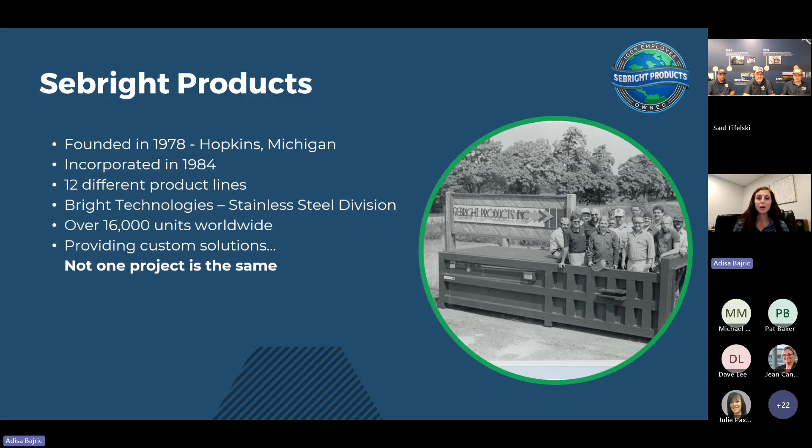We have over 16,000 units worldwide, and we're very much known for our custom solutions. Not one project is the same here at Sebright. We work hard to make our equipment meet the customer's needs.

Just a little bit on our mission, vision, and values. Our mission is to solve waste and recycling challenges through innovative engineering and manufacturing while upholding the highest standards of quality and safety. Our values: quality, community, safety, innovation, and resilience.

Our capabilities: we have an in-house engineering team that uses advanced 3D software for precise, efficient installations and custom solutions for diverse and challenging sites.

Our manufacturing, all of our equipment is manufactured here at our plant in Michigan, all made in the USA. Our install, we have an expert crew that delivers turnkey installation. Our service department offers comprehensive service solutions including PM programs, parts and service with 24/7 nationwide support.

We offer a rental and lease program as well, just some flexible options with buyout and rental assistance. We also have factory remanufactured equipment, with a factory warranty on the REM equipment.

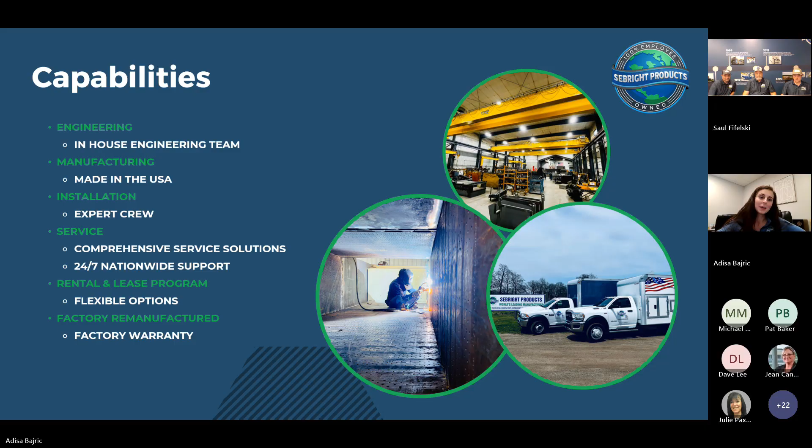And as of April, we are 100% employee owned. Something we're very proud of here at Sebright Products. All of our employees are now an owner, driving accountability and long-term success. In July, we became ISO 9001 certified, showing our commitment to consistent quality and continuous improvement.

We also have lean manufacturing practices, streamlining operations for efficiency and reliability. And as I said, last year we celebrated 40 years. We have 40 years of innovation with a proven track record of durable, high-performing waste and recycling solutions.

And then our vast list of product lines here. We have compactors, our bread and butter, where it all started for Sebright products. We offer stationary, self-contained, pre-crushers, transfer stations, which you're all here for, and portable units.

We've got our high-density extruders, which is a ram press that we introduced in 1992, used to extract liquids from many types of industrial refuse byproducts. A lot of pulp and paper mills use our high-density extruders for their dewatering process.

We also have an EPS densifier for styrofoam densification. We have our Xcycler and Xtractor line, which is for product destruction, primarily in the bottling facility. The Xcycler produces bales of aluminum and plastic, while the Xtractor produces a continuous log.

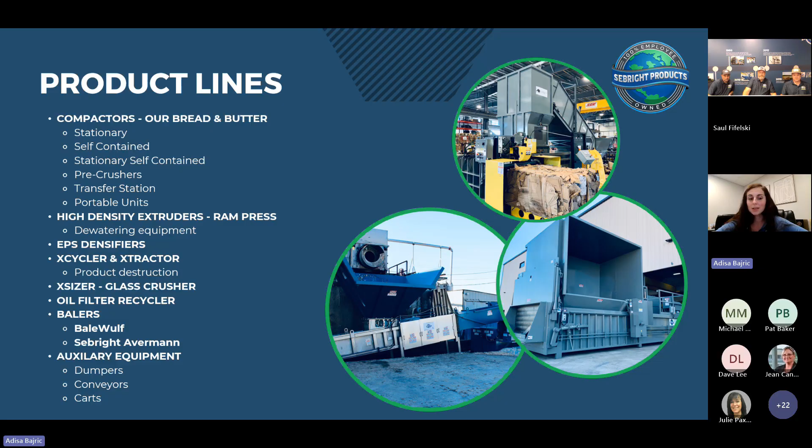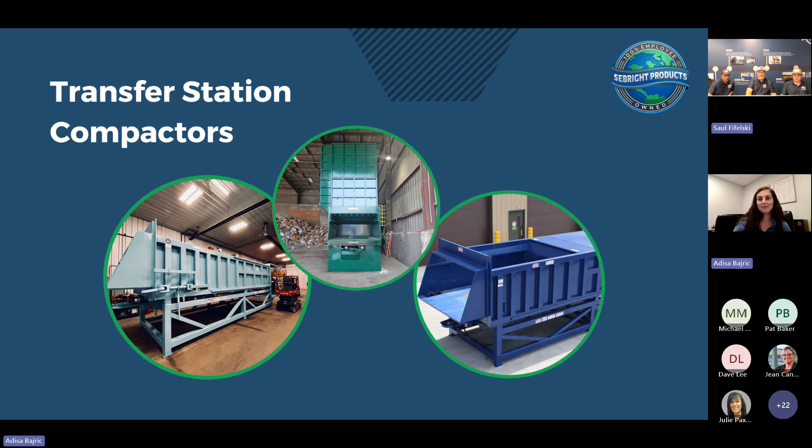So from here, I will hand it on over to Lauren and get you guys started on the transfer stations. Thank you, Adisa, for the wonderful introduction about our company. All right, we're gonna get started on what everybody came here for.

As you know, we incorporated in 1984. We'd already been building 2-yard compactors, 4- and 6-yard compactors, which is our heavyweight series. In the late 80s, early 90s, we'd just finished introducing our 5-inch wall, solid wall pre-crusher, and just had that on the marketplace.

Brent Sebright had caught wind that a company in Grand Rapids was looking for a transfer compactor. We as a company were looking to grow our line, looking to expand our marketplace, took on the challenge with the current engineering team at the time. In December of 1991, we installed our first model, the 9884-2-6, twin 6-inch cylinder compactor.

Spent many years in the Grand Rapids area. Now it's been moved to another location, but ironically, like 34 years later, this unit is still in use today. Yeah, it's very impressive, that's a long time. Can't say that about a lot of units.

Coming through the 90s, we built some variations of that 9884. Some models went to Canada, others went to Wisconsin with the help of our dealers, JWR and Step Equipment. In the mid-90s, we figured out that the 9884 needed a bigger version, bigger chamber, more power. So we developed the model 12084, I believe in 1994. About 4 years later, we made some changes to it to get more penetration, and it's really been untouched since the late 90s. Yeah, it's been our most common transfer machine.

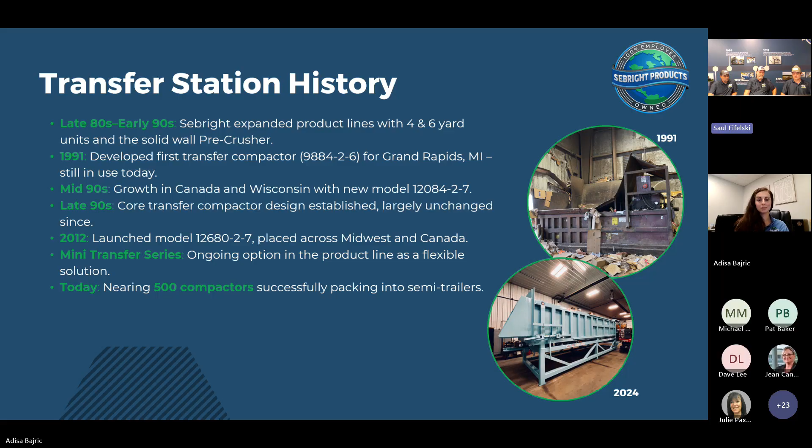So we'll talk about the models that we have. The very first one was a 9884. That's a twin 6-inch cylinder compactor, 8 cubic yard chamber. We then went to the 12084s. That's both offered in a -2-6 and a -2-7. Now, I'll ask Brant to explain the model numbers here a minute, if he could, what the model numbers mean.

So the first two numbers are, well, the first four numbers are your open top size. So you got your, like a 9884 is 98 inches long, 84 inches wide. And then the T is for transfer station. And then the 2-6, that's got two 6-inch bore cylinders in there. And that carries true for almost every piece of equipment Sebright makes. So a 12084 follows the same thing, 120 inches long, 84 inches wide, and two 6-inch cylinders. So yeah, most of our models, the Sebright family, is really easy to figure out what your chamber size is based on the model number.

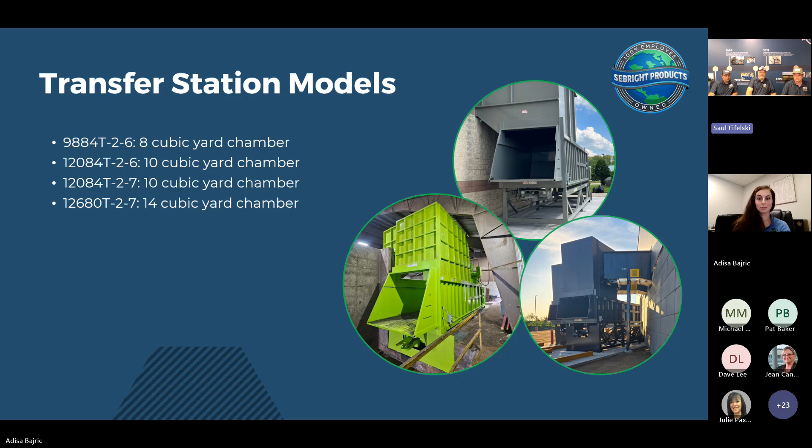We should also note our base units are 84 inches wide, but we also have an 80-inch wide version of all those same models as well.

Attached you will see the literature for a basic transfer compactor. This can be found on our website as well, SebrightProducts.com. Just go into compactors and down to resources, and you can find these data sheets there.

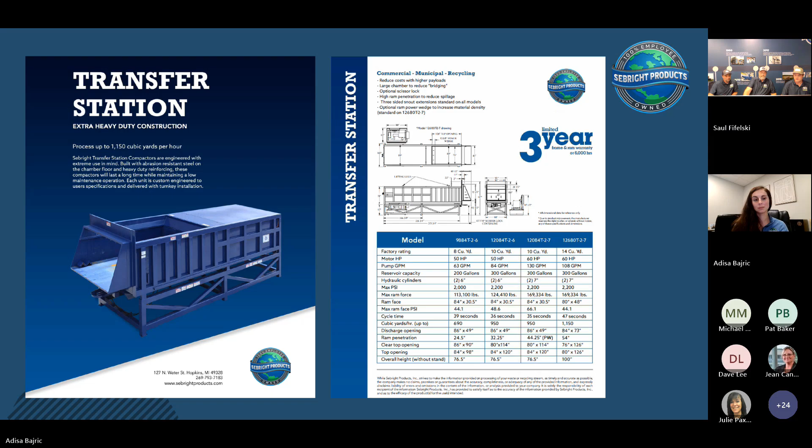Transfer station build quality. All of our transfer stations have a 1-inch thick AR floor plate that runs from the back of the ram all the way to the front of the machine through to the snout extension, which is backed by a 1-inch backer plate.

The 1-inch thick AR plate was one of the changes we made in the late 90s. Initially we had a 1/2-inch thick floor, but over the years, if you had to replace a floor plate, you'd wear that 1/2-inch floor down to a 1/4 inch, and then you're looking at a field fix to replace it. We went to a 1-inch thick AR floor, so you literally have to wear 3/4 of an inch off before you need to think about replacing that floor plate. It was a longevity improvement for us, and it's worked well over the years.

All of our transfer stations also have a snout extension designed into them, which allows the material to be pushed farther into the trailer, allowing for a cleaner separation when the trailer is pulled away. That snout extension is built into the floor - it's the floor extended, all one piece. It's not an add-on that leaves a gap or a void around the ram as it extends.

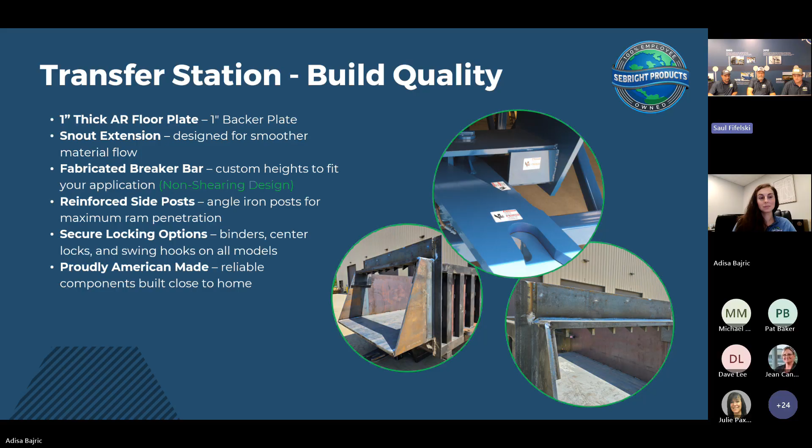On the rear of all of our transfer stations, you'll see we have aluminum rear covers. It's lightweight, corrosion resistant, and you can see in the photo there are some holes integrated in there for handles and also for looking in to see if material is behind the ram.

Coming from the service world, this was a huge improvement, having to lift these heavy panels up. The original panels were 75 pounds and the new panels are approximately 25 pounds, and they've been very well received by those that have them.

Also, the machines have proximity switches - one in the front and one in the rear, picking up the ram position and telling the PLC whether the ram is extended or retracted. The prox switches do not ride directly on the ram, so they're away from debris if anything gets past it. Another advantage is if the ram shoes wear too far, it'll actually stop the unit - they can sense that, and that's when you're triggered to change the shoe, so it helps with preventive maintenance as well.

Does that send a fault? It'll give you a fault, yeah, and get you to look at it. Very nice.

3-piece floating scraper - basically, if you think about a standard scraper that's one bar, this one's three bars. So if you get a piece of material stuck under one corner of the scraper, the other two bars will still be touching the ram, protecting the prox switch behind there from material getting past. It's really important to keep the material in front of the ram instead of behind it. Anybody that's cleaning these up would understand that for sure.

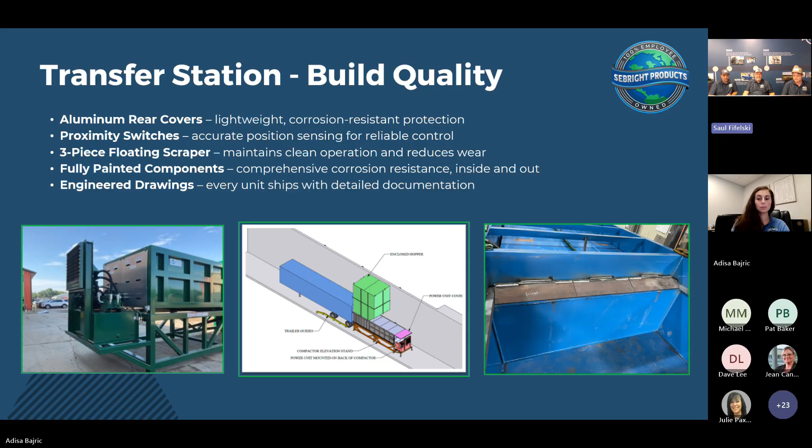Keep in mind if you're trying to retrofit an existing site or a new site, we're here to help with the drawings, here to work with you. We can actually show all the detail right down to what the unit's going to look like on your location. It's real important to get these details right on the front side. These drawings are huge to help getting that done.

Our ram top reinforcement with structural tubing, as you can see in the photo there, it's a kind of waffle pattern of tubing under there, and that's to help reinforce the top of the ram when you're pushing material under the header bar into the trailer, or if materials drop from above onto the ram top. That makes a heavy duty ram top, makes it really strong.

Power wedge is standard on the 12680-2-7, also available on all of our other models. That pushes material, creating a void in the back of the trailer. So when the ram retracts, it allows the material to fall in that area, also helping with cleaner separation. It gives you some additional bottom side penetration with that. It kind of does an upheaval on the material wall in the trailer, pushes it upward, creates the void, and gives any material that falls back somewhat of a void to drop into. And it doesn't take away from your clear top size at the top of the ram.

3-piece guide shoe system. As you can see in the photo there, there's 3 guides on each side holding the ram in the back, true and straight in the machine, so as it guides back and forth, you don't get an uneven wear on one side or the other of your ram. This top shoe is actually thicker, gives you more strength and more wear. The sides and the bottoms don't take as much abuse as the top. And the thickness of these tubes is very important as well. Correct.

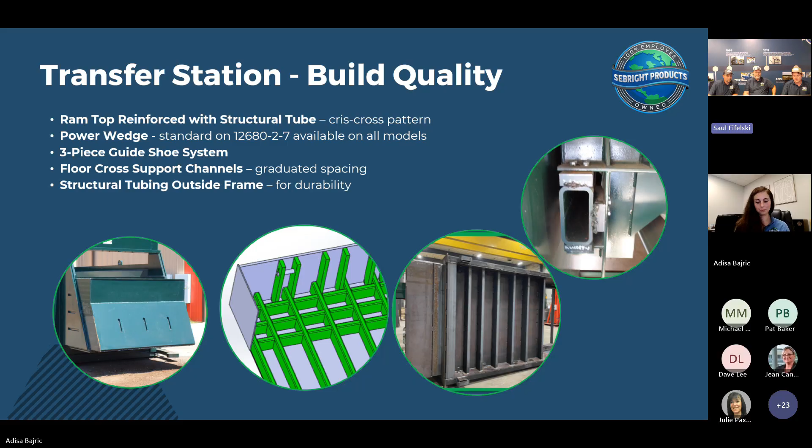The transfer station control options.

I always picture the machine as two parts, the power unit and the machine itself. So Brant went over the machine and the power unit. As long as I've been here, the hydraulic side has been pretty much the same: electric motor driving a hydraulic pump, a 2-section pump for 2-speed, going to the manifold with 2 directional valves, and then the oil goes out to the cylinders, around the ram, back and forth. That portion has been the same for about 20 years.

On the control side, the electric side, to keep up with the times, the PLC's changed is the big one. Right now we have an LCD screen on the PLC, so you can adjust your settings like your full, your advanced, how many cycles the ram does, the jam count, and the auto start. I'll go over those options in a minute.

The jam count, we started that, I believe, around 2006. So if you have a real tough material that you can't push past the breaker bar, what we're doing is retracting the ram and hitting it again, according to your jam count, 2 or 3 times. The ram goes back about halfway, and usually we get it to clear into the trailer, and that's the goal, so you get more material into the trailer instead of tripping full ahead of it.

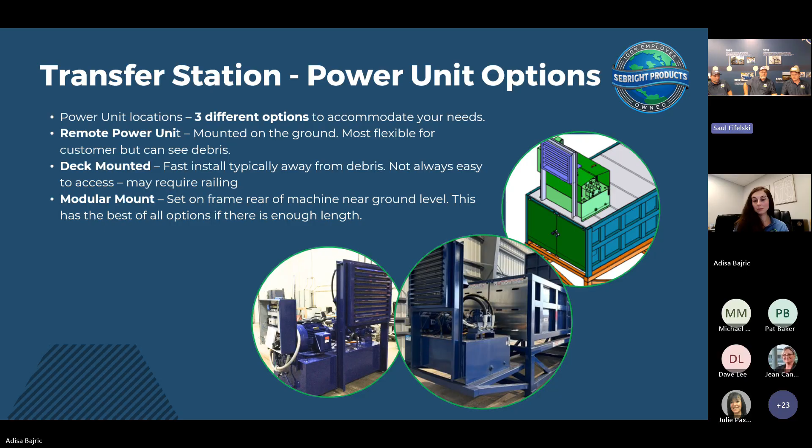We just have an example of what would be in the manual for the voltage chart. This is kind of where we run between the minis and the standard transfer machines - 60 horsepower is our most common.

We recommend these wire sizes for 460 volt. You can see we're at 200 amp service and it's fused for 150 amp. You always have to follow your local codes on this stuff, but we're just showing it doesn't take a whole lot of power to run this equipment - 3-phase, 460, 150 amps, and you're off and running.

So what if a customer has 208 or 230 volts? We can accommodate that - we look into it and design around it. It's typically double the amp size, and they have to be prepared for it, but yeah, we can make that happen, even on the 50 and 60 horse. We have done that, yes.

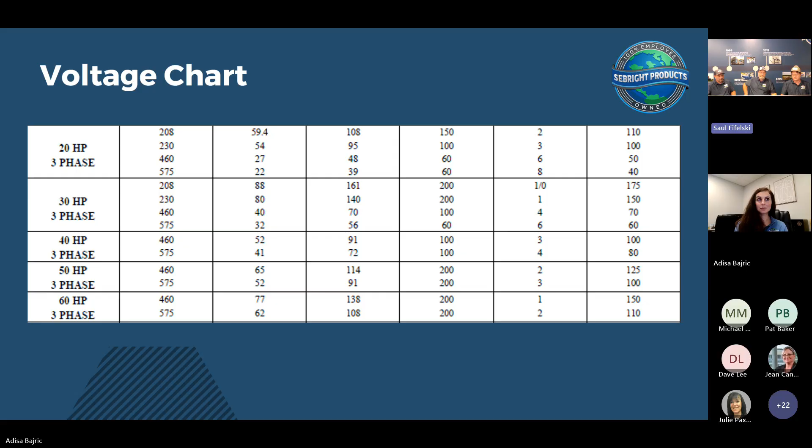Okay, all right. Industry served - of course the waste transfer industry, your typical municipality waste, MSW.

Second one, fiberglass insulation industry - we actually build a custom model for this. It'll be a dash FG behind the cylinder designation. That's a heavier duty machine with thicker sides, thicker floor. It's got a little extra penetration because insulation likes to spring back - you get a lot of memory with that kind of material.

We do 36 inches of penetration on this unit. Keep in mind all these units have some additional penetration options, some add-ons to the face of the ram if needed for particular types of material. We've been running into that a lot lately.

Because people come to us with various things they want to compact. Something we've been doing for years here is automotive headliner - State of Michigan, lots of headliner being produced for the Ford Expeditions, Chevy Suburbans, Tahoes, that type of stuff. Some of these mini transfers have gone into that industry and are performing really well. That's a high spring back type of material, requiring a lot of penetration typically.

We also do organics - wood chips, spent biofuels. We also do units for the medical waste industry; they'd probably be more in the mini line of equipment as well. We have some custom metals that are both abrasive resistant and corrosion resistant that we are speccing into some of these units because the saline in the medical waste is really tough on equipment.

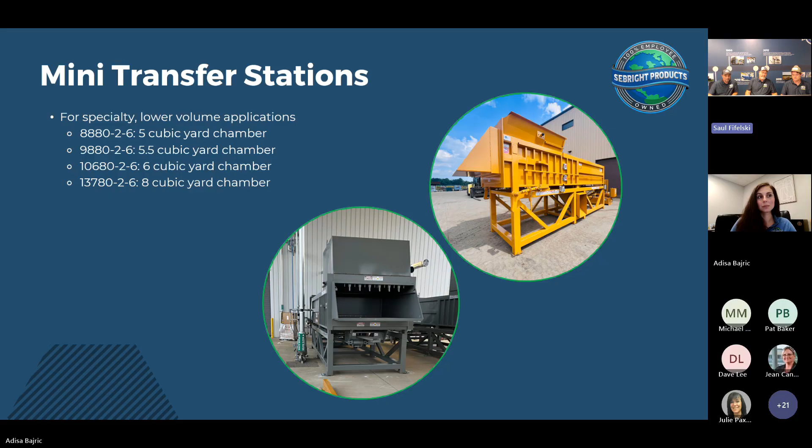Here's another cut sheet that you can find on our website, the resources tab. I know we have a lot of municipalities signed up, probably watching this right now.

We have a line of portable compactors, like say you got a backwoods transfer station in northern Michigan, northern Wisconsin, Kentucky, Tennessee, wherever it may be, someplace that you don't have power. We've sold a few of these units to those situations, those small transfer stations. These are propane powered power units.

They're kind of designed to drop and go, so to speak. If you had a natural disaster, whether it's a flood, a fire, or whatever it may be, festivals, leaf cleanups, township cleanup days. We've had some fairs use them too. I'm trying to think of anybody else that would do it.

It allows you to hook onto this portable compactor with a gas drive motor onto a standard receiver box, and you get the benefits of the security of the receiver box, especially if it's like a store cleanout or something like that. It's a good way to go.

We have one unit here in the yard. It's deployable. If somebody called tomorrow, we could probably get it out of here Friday, type of deal. So we have a couple of these available in the yard for rent as well. We try to keep at least one around here.

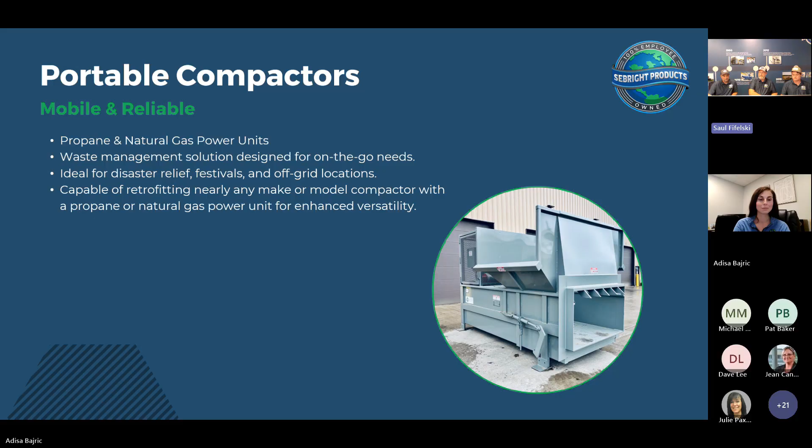Typically, these pack into semi-trailers, but since we're in the automotive world here in Michigan, we also have a lot of these units packing 75 to 100 yard roll-off boxes as well. Not necessarily always up on stand packing into a trailer—we have a fair amount of them sitting at ground level, especially on the mini side, packing into these large roll-off containers.

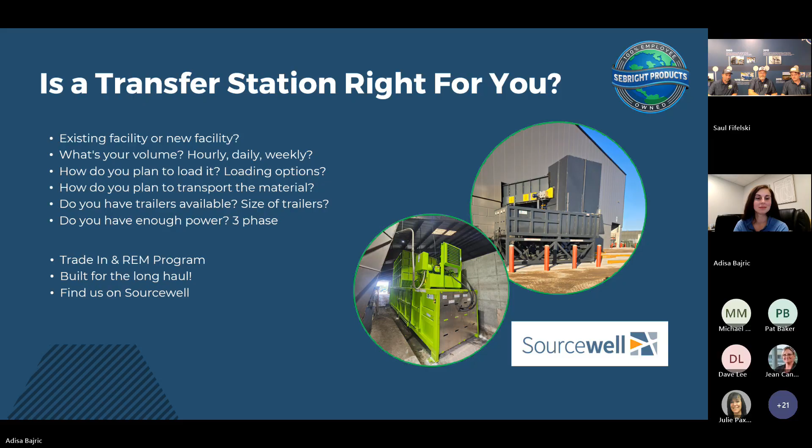Speaking of testimonial letters I got here, the first one is from Mike Shago. He's retired from Step Equipment. He was very instrumental, as was Dave Wolf with JWR, who both wrote the second testimonial on here. So I'll read Mike's here a minute. Transfer compactors impact hundreds of customers. I didn't really think about it that way until he wrote it, but reliability is critical and key. That's why he always entrusted Sebright with their engineering, construction, and support, which are the best in the industry. In my experiences, Sebright units last twice as long as competitors, consistently meet weight targets, and exceed customer expectations.

Second one's from Dave Wolf. Dave was extremely instrumental in this for the last 35 years as well, initially installing these units for Step Equipment, and then later becoming the dealer for Sebright in Wisconsin. So these guys are both friends of Sebright and partners, so to speak. For 35 years, JWR has chosen Sebright for large compactor and transfer station equipment because of their unmatched engineering, quality, and longevity, when properly maintained. Both well said testimonials from our customers, but don't take it from us. Feel free to reach out to these guys and find out who we really are if you'd like.